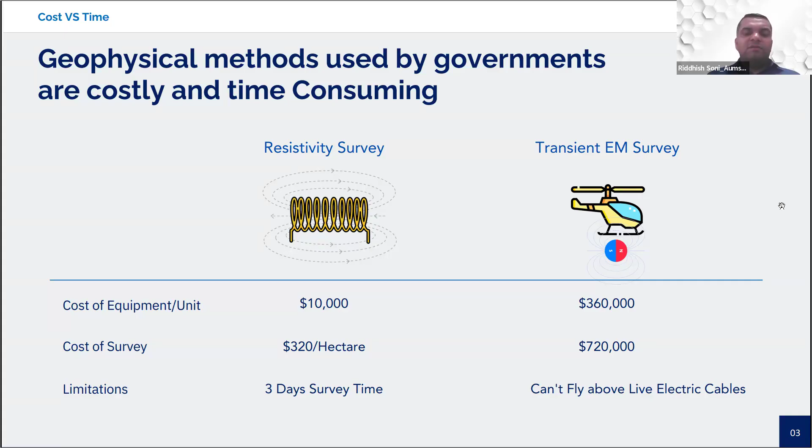When we talk about comprehensive groundwater management, we provide services for groundwater conservation - detecting suitable sites for construction of recharge sites, monitoring groundwater over-exploitation to see exactly where over-extraction is taking place in a specific region, and groundwater targeting and exploration, telling farmers how much water you have, what is the yield, and whether there is water in the first case or not. We also have a borewell inspection robot that goes inside the pipeline and does internal mapping, plus other solutions for groundwater treatment like removal of scales coming from the groundwater.

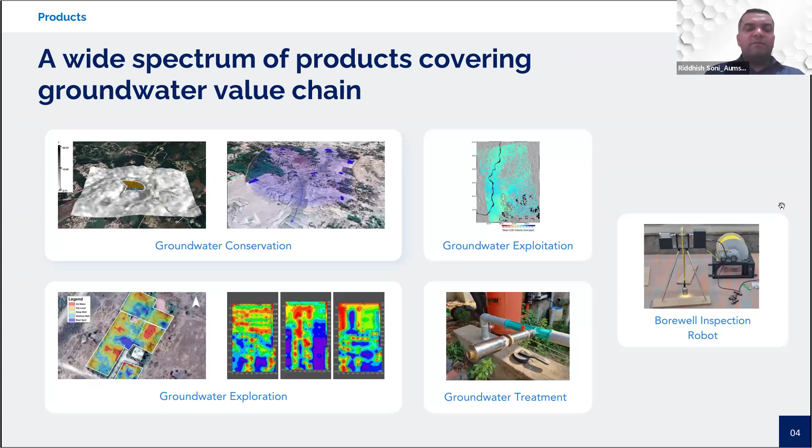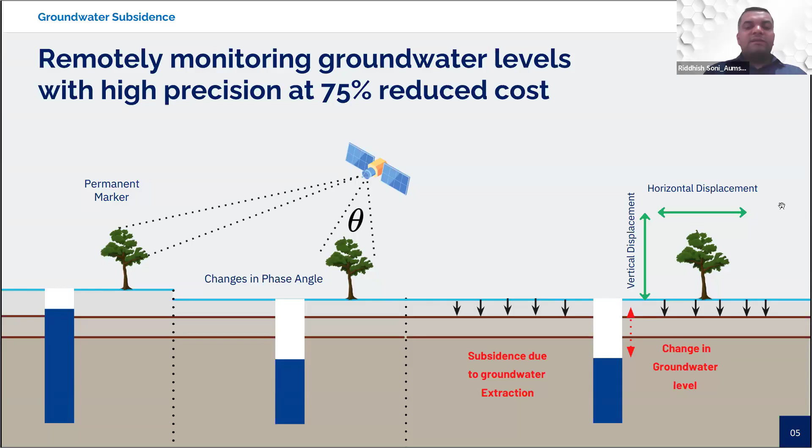By using advanced earth imaging techniques, we monitor changes in the phase angles of permanent markers, which is an indication of over-extraction of groundwater taking place. This over-extraction indication basically helps farmers judiciously utilize their water, or in areas where over-extraction is being done, helps policy be implemented to reduce the extraction.

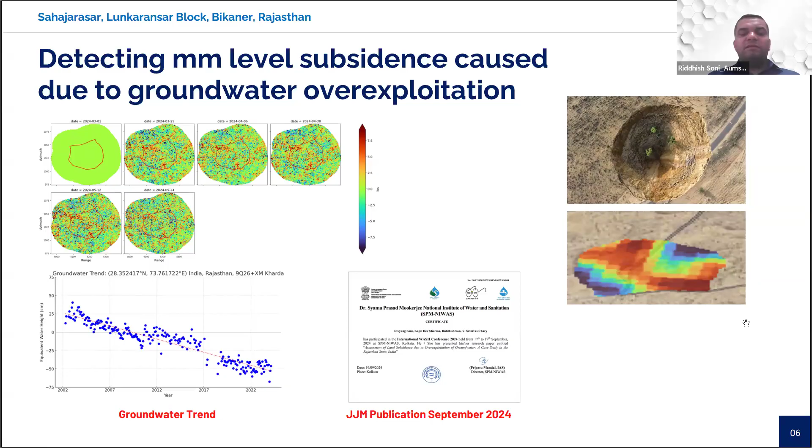This is one of the case studies we did in part of Sahajarasar, in Rajasthan, where a crater had been created due to subsidence from over-extraction. We monitored and measured using satellite observations what the horizontal and vertical displacement was, and how the entire over-extraction took place. We could also understand, from 2002 to 2023, over the last 23 years, how the groundwater table was decreasing. By correlating these two, we could see the series of events that took place, and how the over-extraction happened. This is a publication from the Jal Jeevan Mission in September 2024 that we did.

By using a combination of C-band radar and L-band radar, we carry out a technique called multi-frequency radar interferometry, which gives us the exact quantification of the yield of water present in the subsurface. This is our publication from March 2022, where we detected a river and a paleo channel - a subsurface river - using this L-band radar technology.

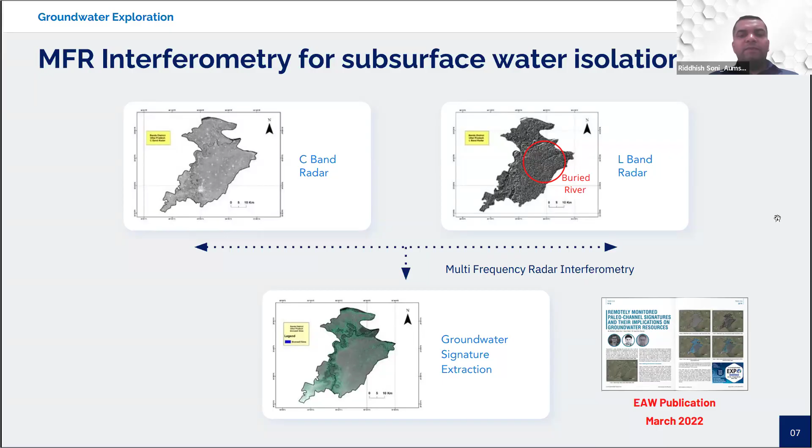Finally, by using a combination of Daichi and Himawari satellites, which are Japanese satellites, we are able to estimate the optimal sites for construction of recharge sites - what is the direction, what are the dimensions, and at what scale the groundwater recharge site can be done adjacent to a borewell, so that extraction and recharge both go hand in hand.

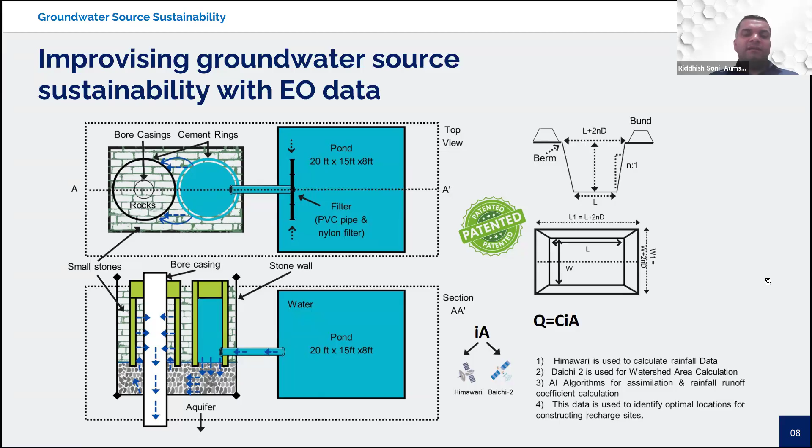We calculate the area and the measurement of the area, multiplied by a coefficient, using Q equals CiA, which gives us the amount of surface runoff, or runoff coefficient, taking place in a specific piece of land. From that we can understand which is a recharge zone and which is an extraction zone.

This is one of the case studies that happened, a very interesting story. There is a place called Mavalgaon in the district of Latur, near Ahmedpur. In the last 60 years, there were no borewells there, and we were the first ones to come up with this technology and detect the first borewell.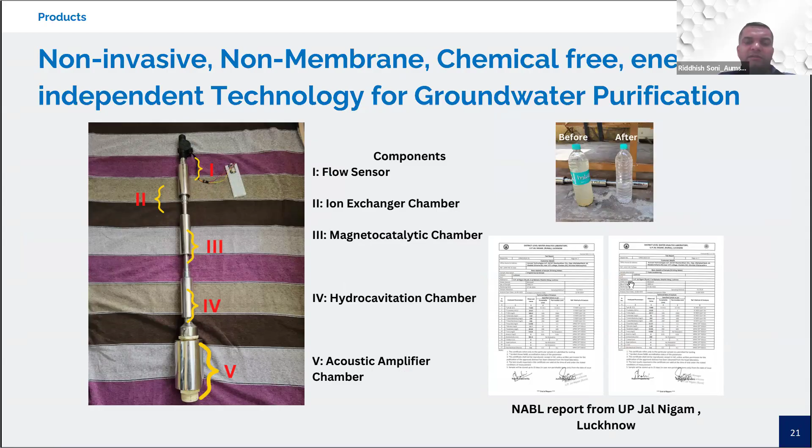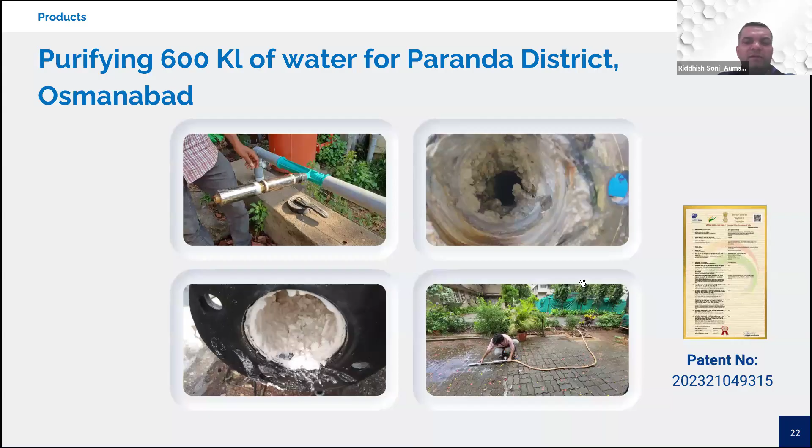In other cases, to solve problems such as groundwater availability and groundwater treatment, we created a magnetocatalytic and hydrocavitation and ion exchange chamber for improving the quality of water. This is our NABL certified report from the UP Jal Nigam in Lucknow. We remove scales inside pipelines and in the water using technology that uses high pressurized water.

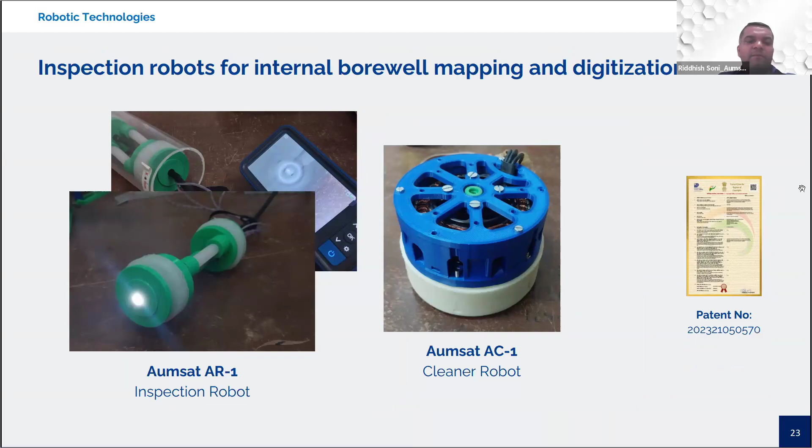This is another technology we have: a borewell robot that goes inside the pipeline and does internal inspection for detecting intrusion, algae, illegal connections inside the pipeline, crack detection, or rusted connections.

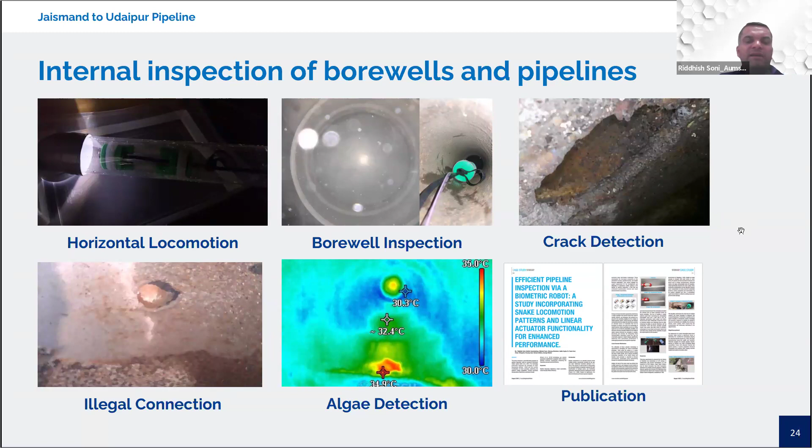This is one publication we have done, using the movement of a snake. Basically, it uses the concept of biomimicry to propel ahead without using any source of power. So yeah, this is my presentation. Join us in making the groundwater infrastructure of India resilient and sustainable. Thank you.

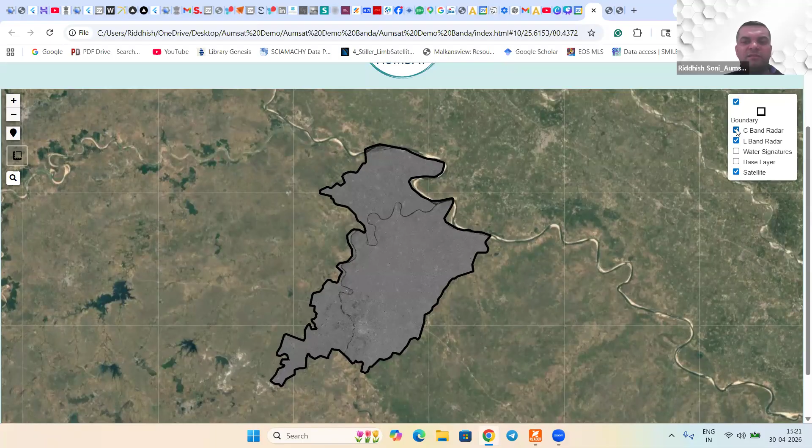Now I'll show how AI works here. This is the boundary of the district. We first utilize the C-band radar, a European Space Agency radar working at 5 centimeter penetration depth. Here you can see a river, and the town of Banda. You cannot see anything further than 5 meters. But when I utilize the satellite called the L-band, it's able to penetrate up to 30 meters into the depth and also detect the subsurface river.

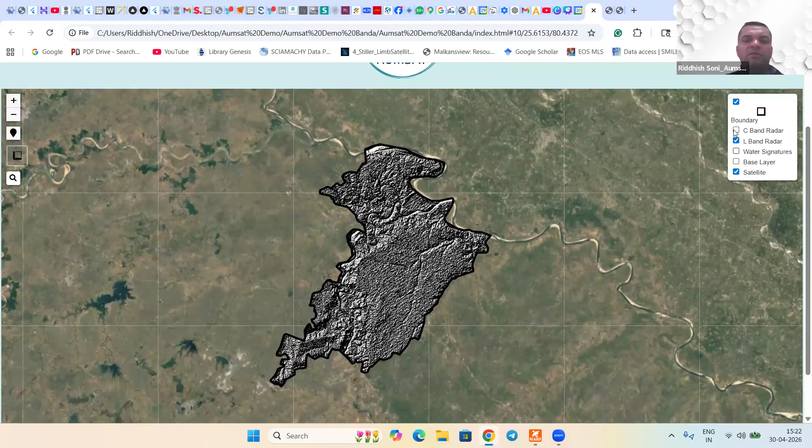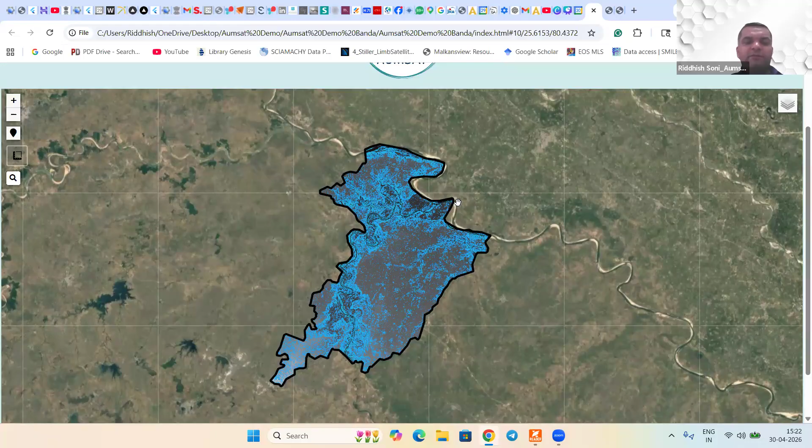In the normal Google image, it was not visible. Even in the C-band radar, it was not visible. But using the L-band radar, you can see the crack and the river very distinctively. When we apply the water detection algorithm, it gives us the entire subsurface water resources for 50,000 hectares of land. Manually or using equipment, it would take 5 to 10 years, but we reduce the time effectively, doing the entire stitching and creation of the image within a week. So you bring 5 years of work down to 1 week. That is the power of AI.

Next question: how can farmers use aquifer mapping for better borewell planning and groundwater management?

If a farmer gives us a location via WhatsApp, we can schedule the satellite pass on his land and tell him whether he has water in the field or not. But finding water is not the only problem, because finding the quantum of water is more important to farmers.

The satellite can go to a greater depth and detect cracks and fissures through which surface to subsurface water propagation takes place, and whether these cracks are filled with water. This helps the farmer decide, based on water availability, whether to proceed, because economics matter a lot. If you get half an inch of water, that's 900 liters per hour, it's not economical to drill since the cost of drilling is around 1.5 lakhs. If you're only getting a small quantum of water, you better buy Bisleri bottles with that money. It's all about economics.

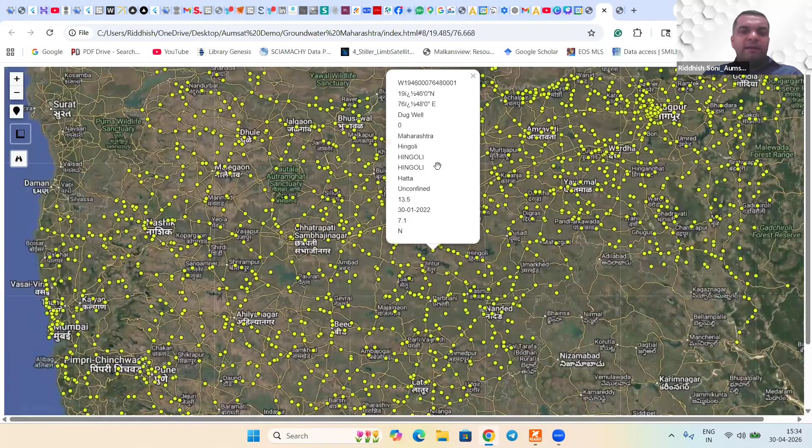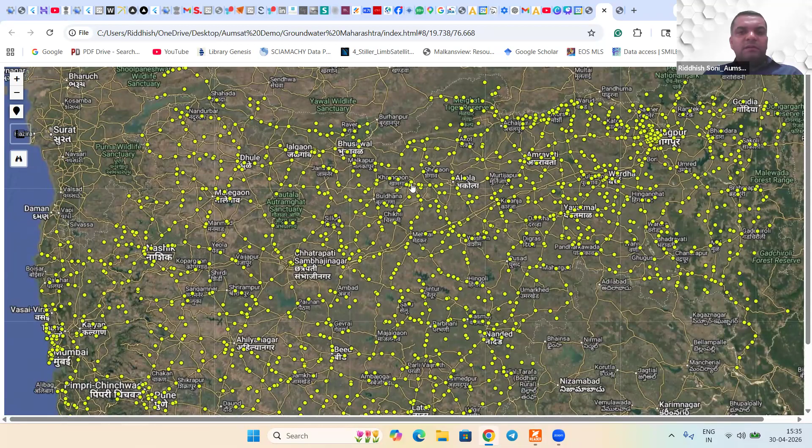So with the support of the Ministry of Agriculture, we created a case study in every block of every district of Maharashtra. Whenever I click on any coordinate, I can tell you the name of the village, the depth of the aquifer, the water level, and when we did the analysis. We have that kind of data for the entire Maharashtra at our fingertips. Since we've demonstrated effectiveness across every block of the state, when any farmer comes to us, we can give them a reference for cross-verification.

Once that trust factor is established, people come on board. We also run awareness campaigns with NABARD. Every month they have an FPO meeting, and the heads of FPOs are connected to thousands of smallholder farmers. That's how we do the awareness campaigns, so NABARD is very much active in this role.

Okay, now I think we have the last question once again.

What future advancements can improve precision in groundwater mapping and usage?

The technology is already available, but when we talk about execution, just finding the point is not enough. You have to actually call the drilling surveyors, and even after the water has been found, you have to do the casing, piping, pumping, and bring the electrical connection to the field. So there are a couple of big value chain steps that you need to ascertain.

Talking about recharge, the biggest challenge we presently have is that farmland holding is getting divided. A farmer who used to have around 10 acres of land before now has children holding half an acre or even less in their name. So now these farmers want water to be shared equally.